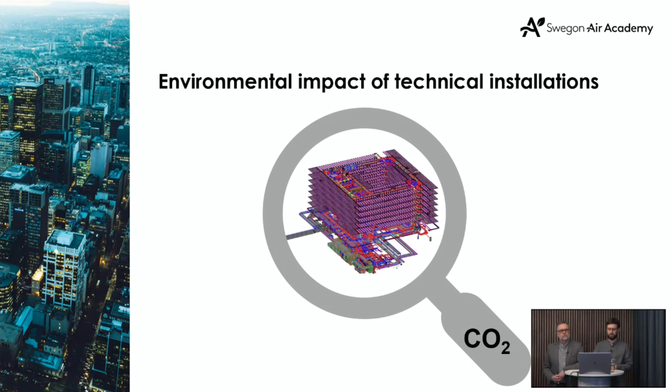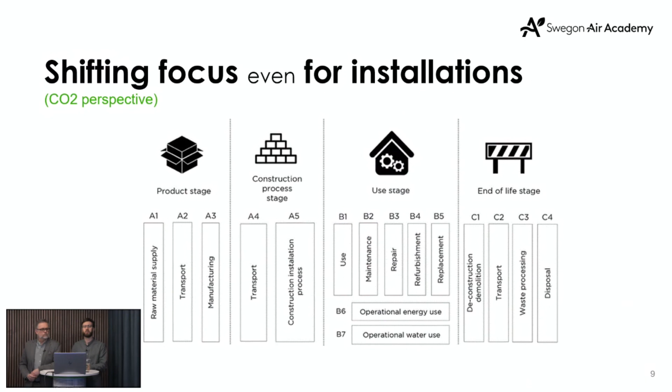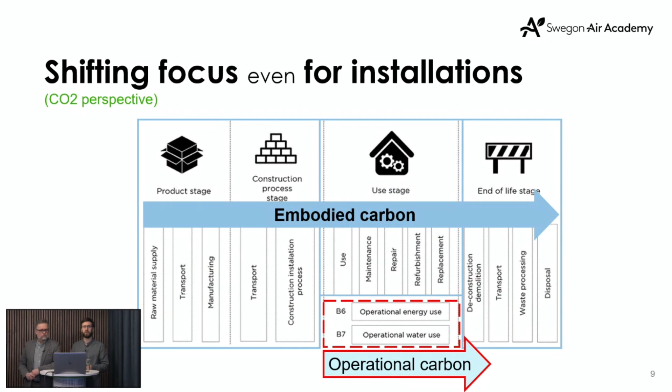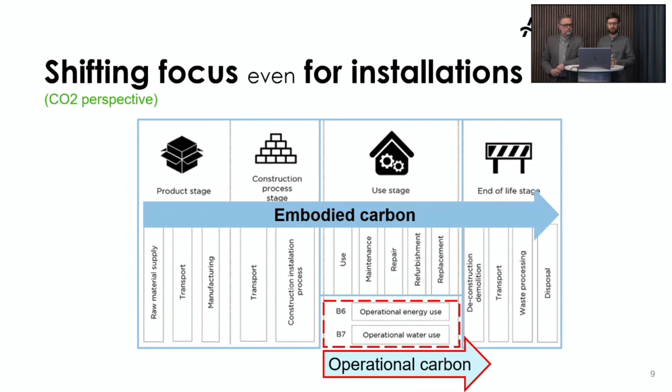So there is a shift, you can say, coming for technical installations from a carbon perspective. Two terms are important here to understand: operational carbon, so emissions coming from the energy use over the building's life cycle, but also over the life cycle of a product that is energy consuming. And everything that is not energy use, so to say, from the use phase, you can call embodied carbon. In simple terms, you can say it's material related. And why is that changing? What is the shift? Well, the shift is towards embodied carbon.

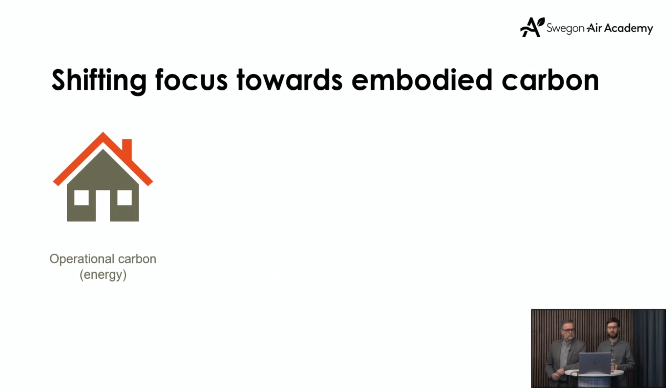Traditionally, our operational carbon, emissions attached or linked to buildings and their energy use, has been dominant over the life cycle because we use a lot of energy in our houses, they are often relatively carbon intensive, and this becomes a huge share. But the ongoing change and the growing importance of embodied carbon is based on that we build more and more energy efficient buildings and get more energy efficient products, and the increase of renewable and fossil-free energy. Basically, over time, this reduces the importance of operational carbon.

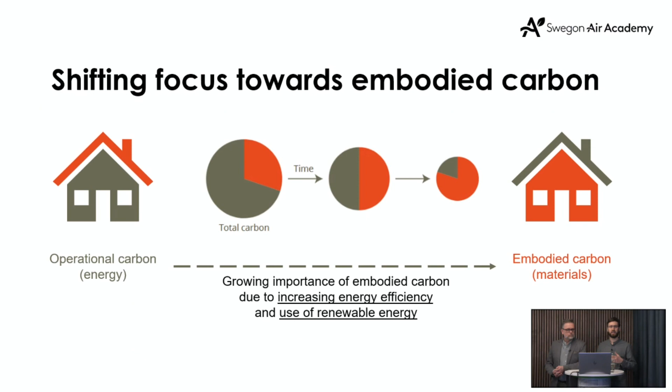In an extreme case, on project level, you can already have 100% renewable energy, either produced by yourself or by your energy supplier. What is left to handle in that case would be embodied carbon, so carbon that is attached to materials.

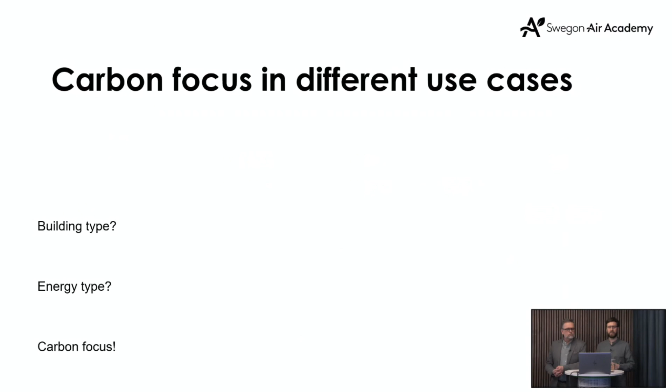So carbon focus can be different in different use cases. I would like to simplify this a little bit. Looking at the whole life carbon of a building, in this case a new building, you can distinguish between 100% renewable and the regular energy mix. With 100% renewable, you have embodied carbon left to manage and reduce. If you have the regular energy mix, it is most likely that the operational carbon is still dominating, and we have strategies for those because they are energy related. This is what the industry is working on.

When we have an existing building, we have the same logic: 100% renewable energy or the regular energy mix. You have embodied carbon again in the renewable energy case. When you have just a regular energy mix, it depends a little bit on the case or the project, because many of the carbon drivers in an existing building are already in place, like walls, windows, roofs, and structural elements. In a renovation, interior and technical installations are often in focus.

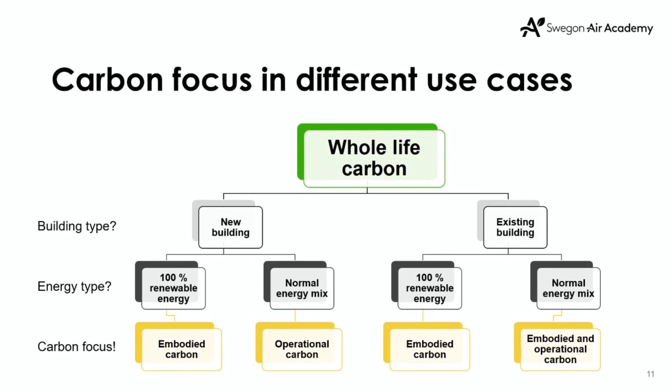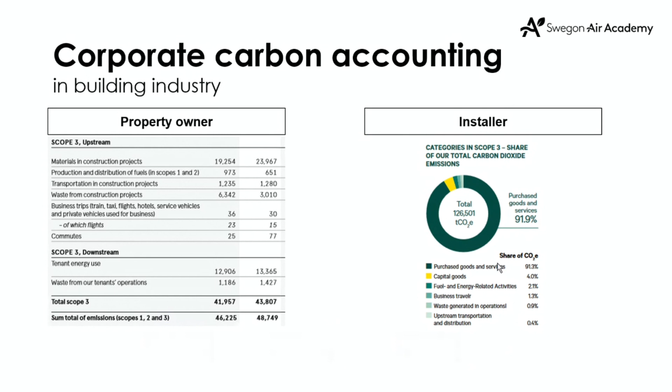On top of that, from a corporate perspective, carbon accounting is increasingly important legislation. Looking at these, here I have two examples of property owners and installers. You don't have to read the numbers, because the message is basically that the so-called scope 3 emissions of the value chain, upstream and downstream, is very, very large. For many companies it's 70, 80, 90% of their carbon inventory and performance. Very often for building or construction companies, this is dominated by materials or waste. In other words, that is embodied carbon.

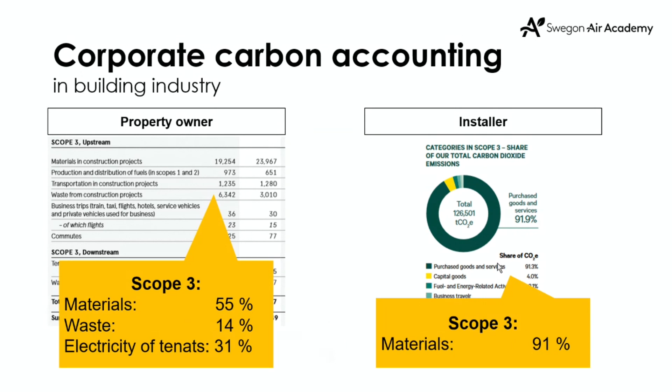Strategies for that, there are not so many yet, but circularity has probably good and very potent potential. Going from a more linear economy towards a more circular economy, you can do that in different ways, and there are many illustrations you can find. To explain this a little bit, you find the so-called R strategies or re-tactics, there are different wordings on that. At the very bottom, you can see the useful application of materials like recycle and recover, they are known. Many of these strategies and tactics are nothing relatively new.

But then if you go more to a circular world, you extend the lifetime of products and parts, for example through reuse, repair, refurbishment, remanufacture, or repurpose. If you really go further, you start to refuse things to do in some cases, but that's relatively hard and challenging. And you start to rethink how you can achieve the same thing with less environmental impact and resource use. You can also reduce. These kind of underlying strategies are very much the core of circular economy.

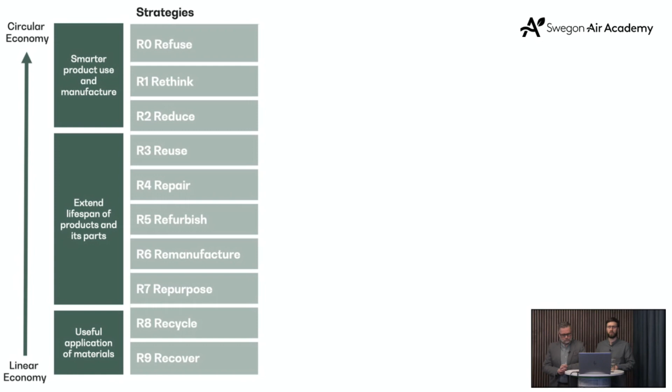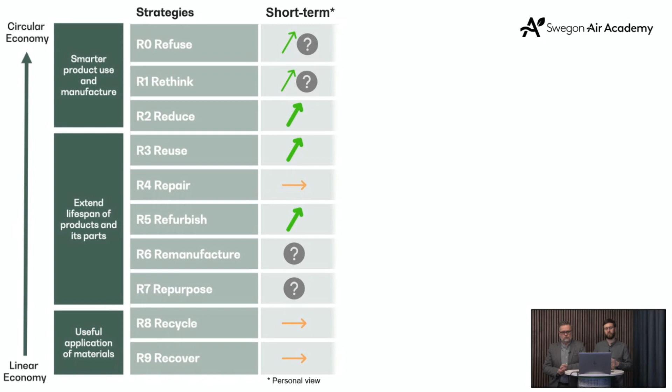In that, I take the liberty to give a slightly personal view, take it as it is. I would say that some strategies are more promising and a little bit clearer in the near-term future for technical installations. For example, reduce and refurbish are probably very promising and potent in the near future to apply when it comes to the transition to circular economy. The traditional ones like recover or recycle have been very good in a linear world, but in a circular world, they are sort of almost the worst solution.

So one of the key takeaways here is obviously that these strategies are not suited for everyone in every case. It can be different on product or company level, and even on a project level, it can be different which is the most suitable one.

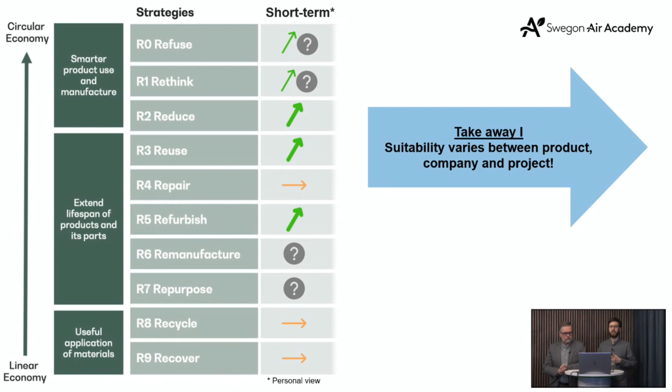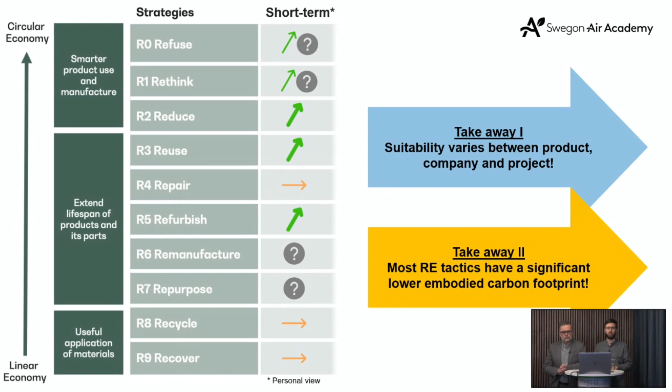What is important to understand is that all of these strategies usually impact the embodied carbon performance, and they are significantly lower in many cases because you have non-virgin components or ingoing materials, and that usually reduces the embodied carbon impact. It depends on what you do, it is usually not going to zero, but one example: if you reuse one product and give it a second life, the carbon load for the first lifetime is taken there 100%, and the second life, a little bit simplified, is zero or close to zero, depending on what you need to do to give it a second life.

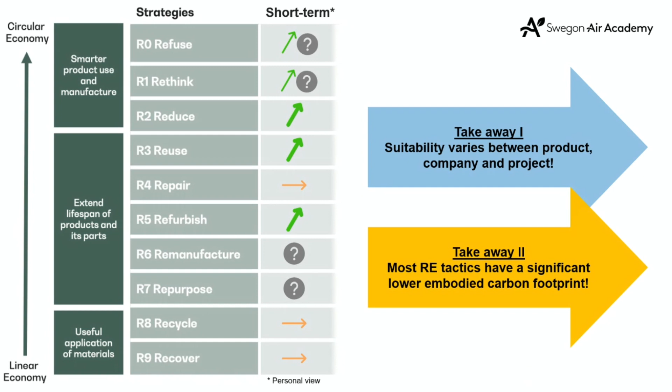And that basically, I try to outline here that we see the link between technical installations and circularity, and basically what are the underlying metrics. And also, we may have already some questions in the audience.

Thank you, Mirko. We don't have any questions in the chat yet, but please feel free to put questions during the webinar. This is a great introduction, Mirko, to the topic of today. So thank you for that. Your key takeaway is that there is a shift from operational carbon to embodied carbon.

As we are replacing more and more fossil fuel energy sources with solar and wind instead, the focus will be more towards the embodied carbon, as you say. But at the same time, we are trying to get the EU member states to start harmonizing the rules when it comes to EPD. And it looks very different in different member states, doesn't it? And what kind of prerequisites you have in the different states. As a provider of technical installations, what demands do you think it will put on us as suppliers in this chain?

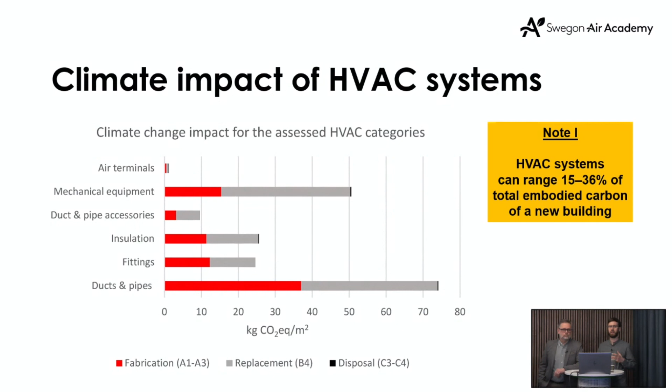And they published that the HVAC system can be as much as 15 to 36% of the embodied carbon of a new building, which is quite significant.

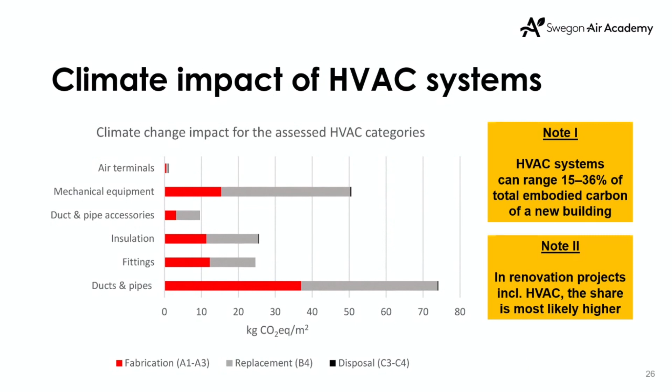Even in renovation projects, it is very likely that some of the heavy carbon drivers, like walls and structural elements, are already there. But in a renovation, you have interior and technical installations being renovated, and the embodied carbon is significant for many of those. You most likely end up on a list, an overview of the embodied carbon in your inventory, same as you do with traditional parameters like function, price, or energy consumption per square meter.

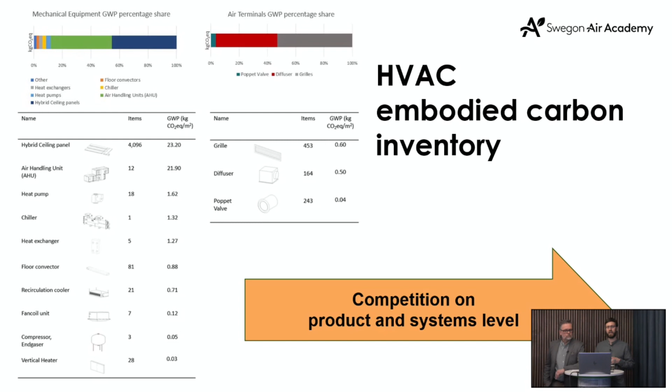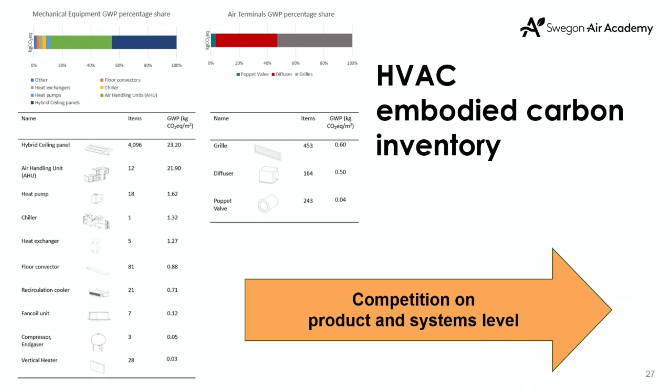Then you look at this and add a parameter of what is the CO2 performance per square meter. Here you probably derive that competition is added on a product and systems level, on top of the traditional parameters.

As you asked previously, I will give some short insights into our learnings from the Combient project. We share the ones that Louna presented, but when we look at understanding the customer, we see the demand is there and it's significant. But when you talk to different stakeholders, you see that some of the details that in many cases are crucial are a little bit unclear.

Measuring impact is difficult for some, but it's very crucial in this development. You want to know your status quo and how much you reduce. That's very interesting, but for the early stage of this development, multiple definitions of what is circularity and how it can be measured is a little bit challenging.

When it comes to reverse logistics, you see that qualitative dismantling and demolition, traditionally, you just take the sledgehammer and take everything out, throw it in a bin, and then ask can you refurbish this. There you can start with preserving value instead, probably value destroyed otherwise. But we also see new actors emerging to do this, and some of the traditional actors also move in this direction.

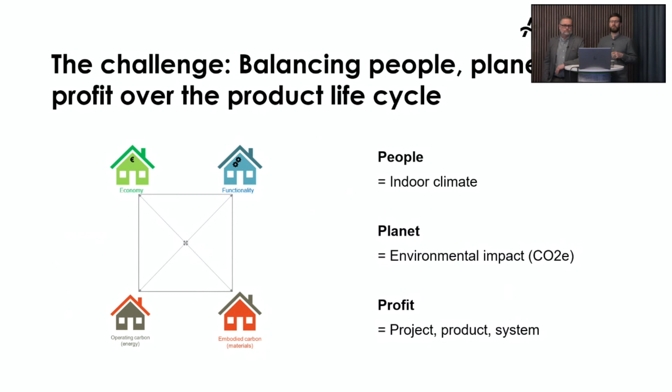Coming to one of the biggest insights, probably the most interesting, is from a more holistic view: the challenge at the moment is balancing the people, planet, and profit perspective—environmental, economic, and social—over the product or building life cycle. In our case, we need to balance indoor climate, operational and embodied carbon, all the other project specifics and system solutions, and then price. At the moment it's probably difficult to get everything at the highest level.

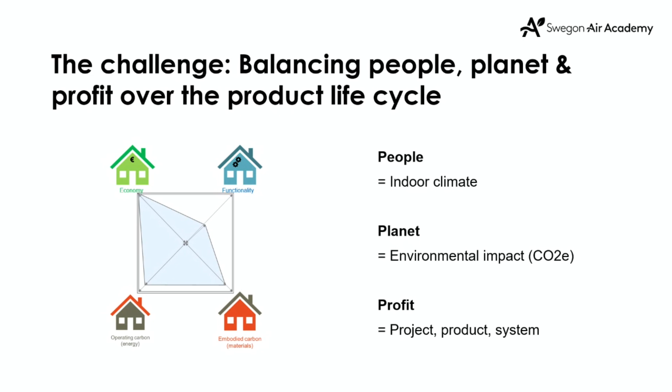There is quite some lag, there are open questions. So you need to be aware of the trade-off, you need help and transparency in this collaboration to be aware of what is the actual focus and preference for you and what can be done. That is a huge learning, and I think we have progressed there quite massively.

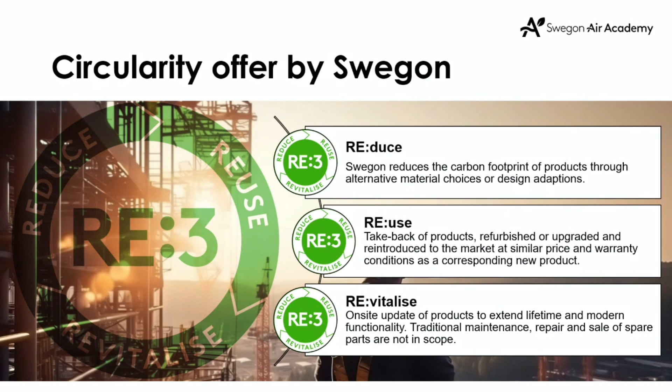So giving it a second life, giving it a third life. And over to the revitalize - that's about on-site updates in order to extend the lifetime and add modern functionality. It's like a refurb kind of perspective, but here we exclude traditional maintenance, repair, and sale of spare parts.

We continue to do that, but that is not the focus of this RE3 concept. This concept is there to guide our customers or potential customers in this journey and transition, but also guide our own organization where and how we want to work. And some examples at last show how to do that in practice.

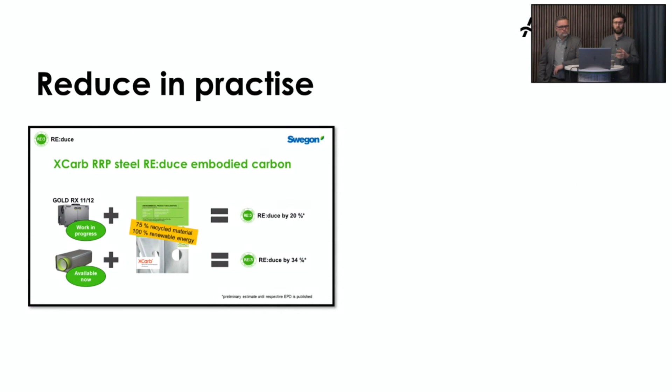Here we have two products, a sound attenuator and an air handling unit, being produced in low carbon steel. With that low carbon material, you can achieve significant reductions in embodied carbon, up to 20 or 34%. But even when it comes to product groups like chillers and heat pumps, refrigerants is a very popular topic. Natural refrigerants like propane have an actual global warming potential close to zero.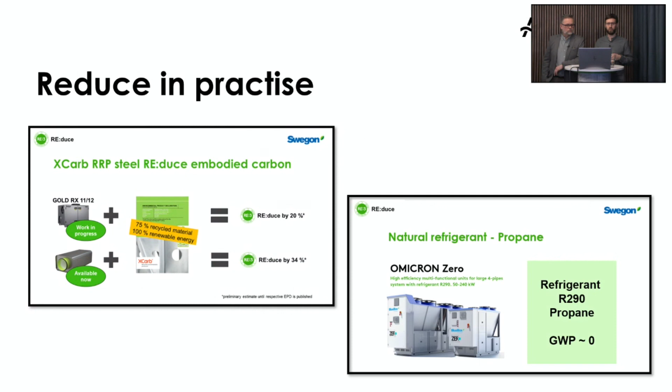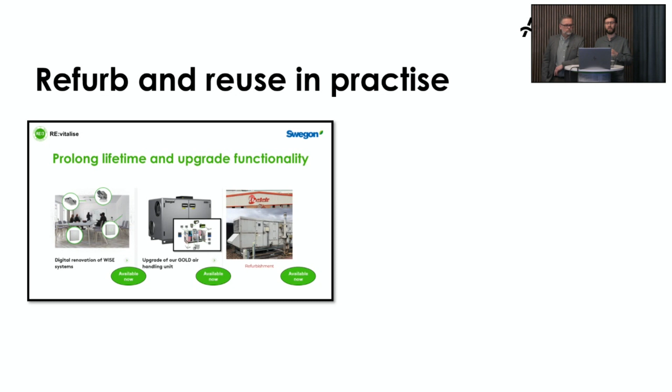And this is also a way to reduce embodied carbon of this product group. When it comes to refurb and reuse in practice, we have digital renovations of WISE systems where you prolong the lifetime of these systems and add functionality, but even physical updates, for example for air handling units of our GOLD units, where you have a refurb kit to prolong that - much less invasive into the building operation than taking everything out and putting in a new one.

And that can be done in different ways. But probably the aspect of reuse is where most collaboration is needed throughout the value chain. We have done this in a couple of pilot projects. Here are some pictures of where an air handling unit has been dismantled and then reverse logistically transported to the factory, to look at how this can be done. Here we need to scale up and collaborate, and this is what we want to do more in the future.

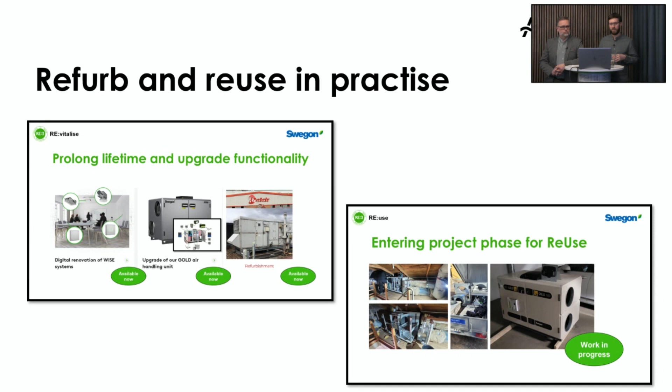So I hope you find this contribution, information, useful, insightful, and maybe inspiring. And maybe there are some more questions in the chat, Åsa.